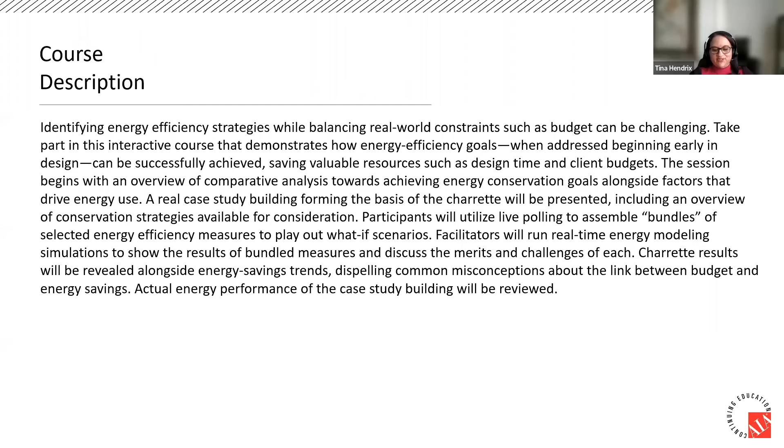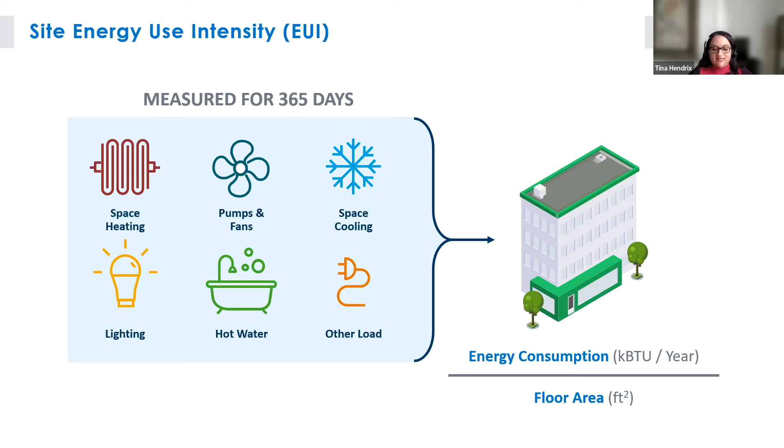You might be familiar with the difference between site EUI, which looks specifically at on-site energy consumption, and source EUI, which also takes into account inefficiencies in generation and transmission. But for today, we're keeping it simple and we're just looking at on-site EUI.

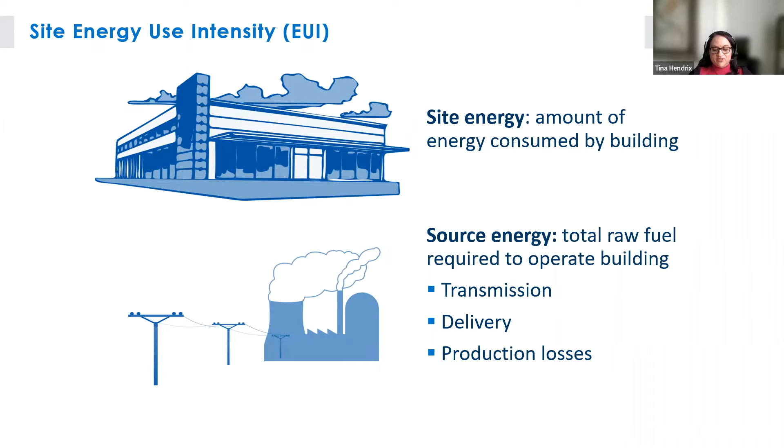So where do we start? Okay, I'm going to hand it over to Tan. So he's going to walk us through even further and define other parameters for us. So Tan, where do we start?

So far we kind of talked about the big picture of energy efficiency, basically the impact on the grid, and more importantly on the site. So right now we're going to dive in a little bit further on the energy efficiency of the building itself.

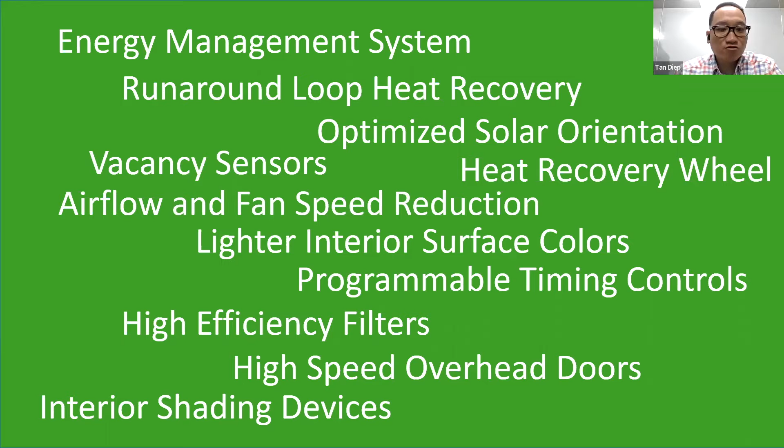So here we have an example of some efficiency strategies that you might want to consider. We have some additional and some more. And next thing you know, you become overwhelmed and you're unsure of where to start. So how do we cut through all this and make sense of what's going to be best for the project itself?

So let's clear the slate and let's start with knowing what the goals should be, or what would normally be, for most owners, their goals. Obviously, each one of these goals is a little bit different and they will lead you down a different path within your design. So it's important to understand which one of those goals it's going to be. Obviously, if you look at EUI, you might have a different path to go compared to what the payback would be. So understanding those goals is always the first step in deciding where to begin.

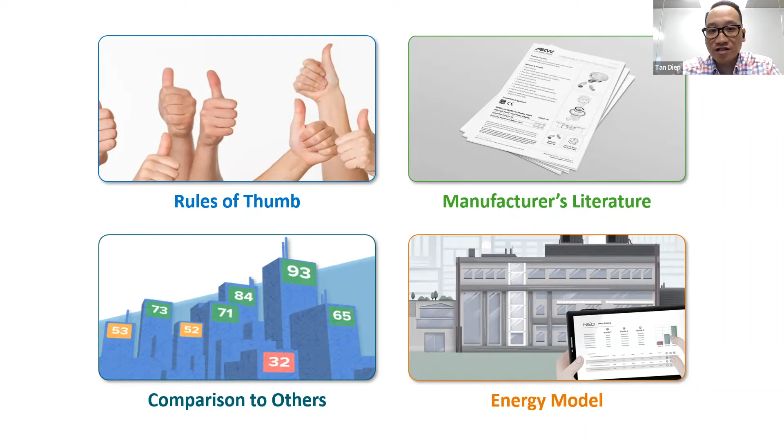Once you have your goals, it's a good time now to strategize. Well, what strategies do you usually use? Rules of thumb, maybe looking at manufacturer's literature and deciding upon particular equipment that way, or maybe looking at EUIs, comparing one building to another as a result, but also, more importantly, looking at energy models and comparing what those efficiencies would be in the building strategies that you would normally choose.

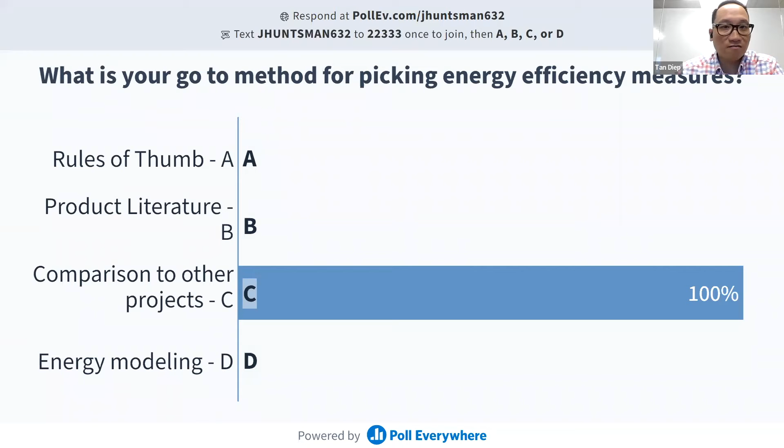So here's a quick poll. What's your current method that you would go with? A, rules of thumb. B, product literature. C, comparison of one project to another. Or D, energy modeling. So it looks like comparison of other previous projects is probably the common one that most folks on this presentation would normally do.

Now, what's important is also when we're comparing things, we're comparing two identical things together. You know, it's the old adage, are you comparing apples to apples, right? So when we're comparing buildings, take for example, we can easily take an example of a retail building in the same location, so identical climates, same function types, same square footage, window to wall ratio, and hours of operations are identical. But let's say we reorient one of the buildings by 45 degrees. You'll be surprised that the energy efficiency or usage is going to be slightly different compared to the two, even though everything else, all the variables, are almost identical.

But because we reoriented the building by 45 degrees, the sun may be impacting the building a little bit differently. So that would essentially affect what maybe your cooling loads would be. Maybe your lighting loads would be a little bit different as well. So those are going to be key factors in deciding and comparing everything.

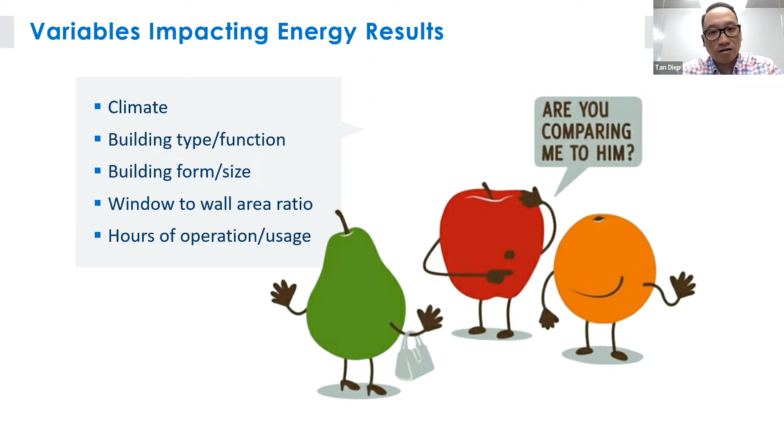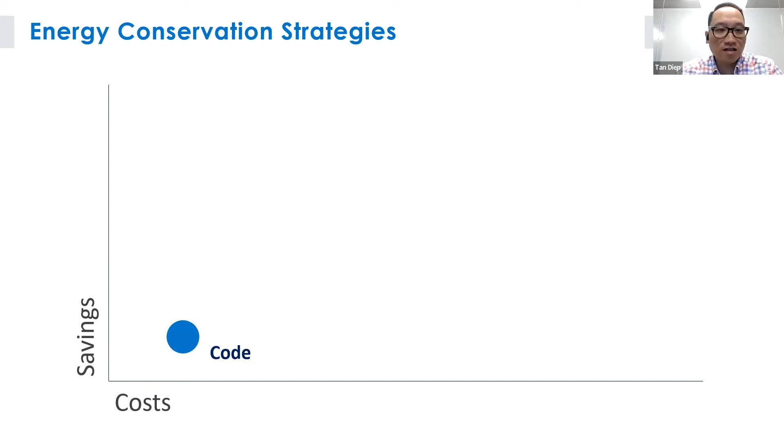When we look at these energy conservation strategies, we want to look at three scenarios: good, better, and best. Good typically being your current design, where it currently sits. Better is improved strategies above what the baseline threshold would normally be. And best, if cost wasn't a factor and everything was available, what would be the best solutions for you. But obviously we're trying to have that good balance between initial costs and energy savings of the building itself.

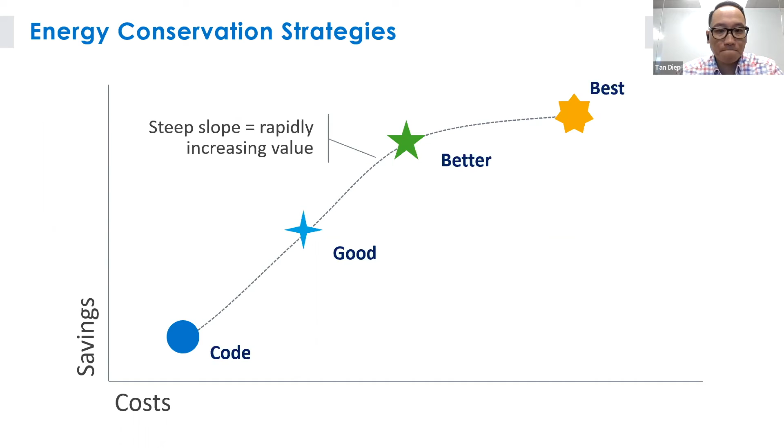The best time to start energy savings is as early as possible. Usually if you're in schematics or design development, it's a good time to start considering an energy model for this, because the earlier you have it, the better impact you can have within the design scope with minimal impact to what cost would be associated.

More importantly, you always want to prioritize minimizing the load first prior to implementing any cost-effective energy efficiency measures. Then you can look at renewables or alternate energy sources, and then consider operations and building usage as well. But usually it's best to reduce your load first.

We talk about reducing load first mainly because of the duck curve, which happens in California but also nationwide. There's been a huge ramp up in installing photovoltaics and renewable energy, but the problem is it's generating usage at the wrong time. There's a ramp up when the sun starts to go down to when we need that energy to go up, and that usage starts to increase now that photovoltaics aren't generating energy when we need it. That's what causes the duck curve.

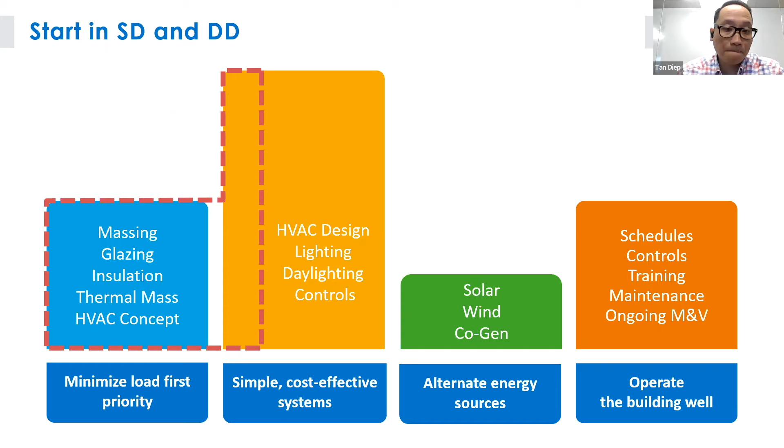Moving along here, when we're doing a comparative analysis, we always take into account what the building geometry would be, hours of operations, along with the weather, and we're looking at the minimum requirements. When we're talking about minimum requirements, we're talking about the type of equipment, like your HVAC, your service water heaters, the plug loads, or any type of heavy equipment that may draw higher loads within the building.

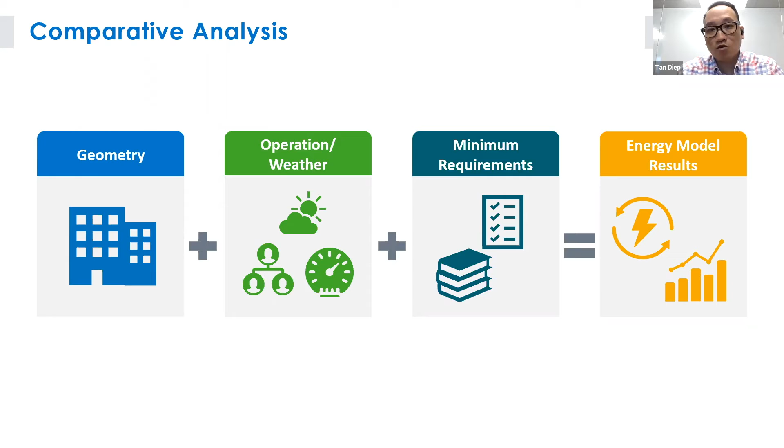When you're doing a comparative analysis of these model results, essentially what you're doing is keeping your geometry and operations exactly the same, then swapping out some of the equipment, like your HVACs or additional loads and efficiencies, to see what that comparative analysis or those results would be from each other. Because at the end of the day, when you look at these efficiency measures, it's not a straight addition of what those energy savings would be.

So that's why we have this math problem of 2 + 2 does not always equal 4. It's 3.25. A great example of this is maybe LED lighting.

LED lighting is a fairly easy, achievable item for a lot of people to do. But the problem is, with most LED lighting, it helps reduce the energy load, which in return helps with cooling loads during the summer. But it doesn't help with heating loads in the winter, because if you had a different type of lighting compared to LEDs, those lighting systems will emit some heat, which adds to the heat that would be passively generated within the building itself. So you may not necessarily need to heat up the building as much during the winter. It's kind of a give and take, and you're trying to find that balance.

As we said before, it's not a straight addition of energy savings. It's how everything interacts with each other at the end of the day.

Going back to that long list of energy efficiency measures, let's wipe the slate clean here and just focus in on these six measures instead, or categories. We'll concentrate on building massing, the envelope, lighting controls, HVAC, demand control, along with energy recovery.

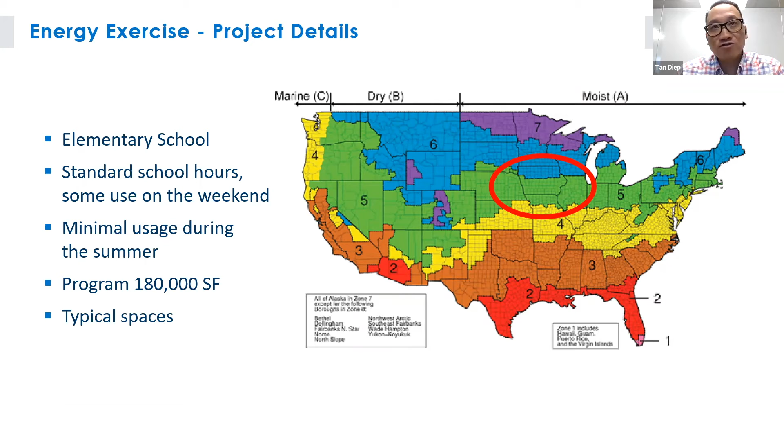For this live exercise, we're going to use a school project as an example. This project is going to be in the Midwest, in a different climate zone than what we're used to here. For us, in our climate zone, we're more in climate zone 3, under what IECC would refer to. But in this particular case, this project is in climate zone 5. So I'll point out the different strategies that we might consider for California instead. But for this exercise, we're going to have a project based in the Midwest here.

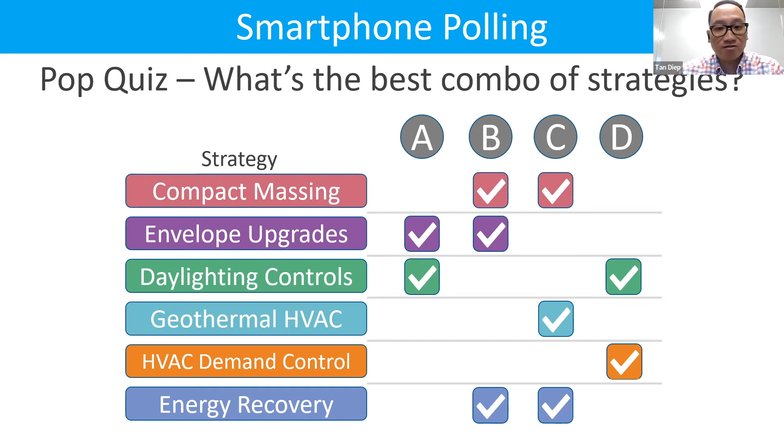Quick pop quiz. These are going to be 4 different combos of strategies here. I'm not providing a lot of information, so this is going to be your best guess, or first blush, of what would be the best combination of strategies that would provide the most impact to energy efficiency. Option A would be upgrading the envelope, with higher R values for the exterior walls and roofs, combined with daylighting controls. Option B, combinations of compact massing along with the improved envelope and energy recovery. Option C, compact massing and a geothermal HVAC system with an energy recovery system. Or D, daylighting controls and HVAC demand controls. So with that, which combination?

We have a question in the chat asking if it's an existing school upgrade or a new ground-up construction. It is a new ground-up construction. Thank you.

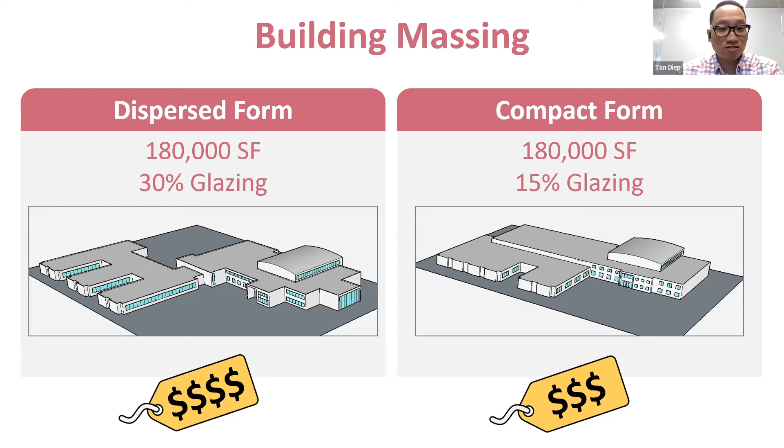Let's start with building massing. Here on the left, we have a dispersed form. The square footage is exactly the same for both. You can see the dispersed form has higher glazing, about double the window wall ratio compared to the compact form, but the cost for the dispersed form is also a little higher. There are trade-offs: with the dispersed form and higher glazing percentage, you get more daylighting coming into the school project, which could reduce lighting power density. The opposite occurs with the compact form, where you might need to increase lighting density because you don't have as much natural daylight coming into the building. So these energy saving strategies are not a straight addition; these factors play into each other, and energy modeling helps understand how these strategies interact.

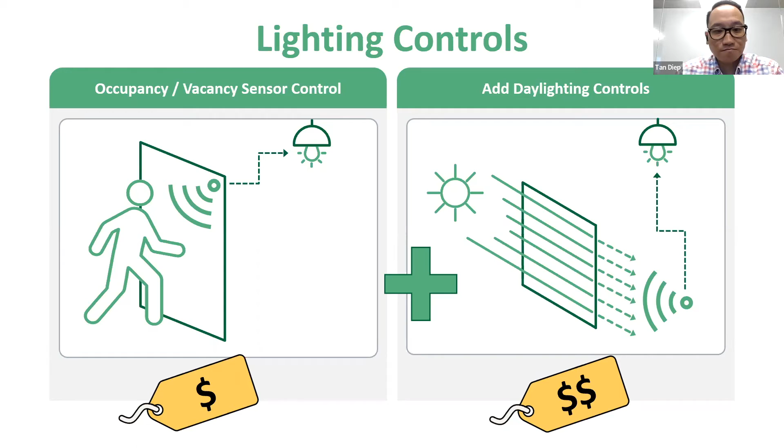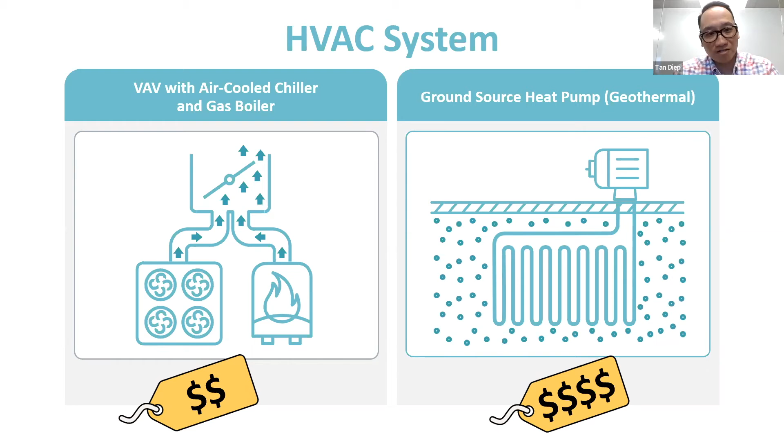Tan, one more question. Excuse me, on the dollar comparison, is it only the initial cost and not factoring in life cycle cost over a number of years? Correct, we are looking at the initial cost more than anything else. So when we're looking at the initial cost, that's going to be the incremental cost more than anything else, what that initial impact is. We're not factoring the life cycle cost. Obviously, if we were, you would have to start factoring what the annual energy savings would be, what that initial upfront cost would be, and then you can figure out what that cumulative energy savings would be and how quickly that payback would be.

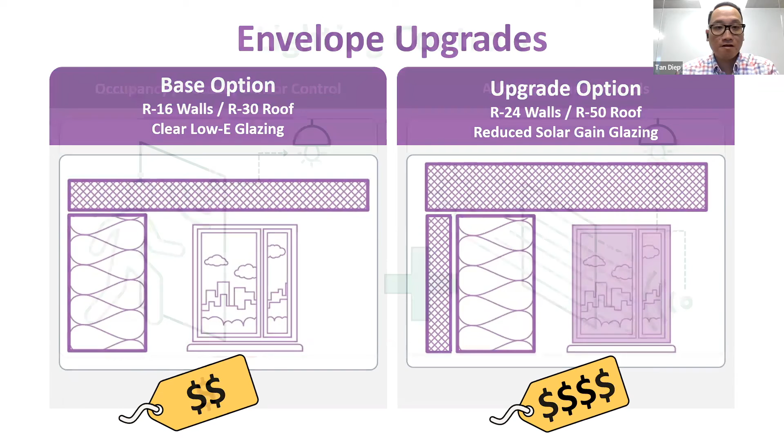But it's on an individual basis for most components that a lot of folks end up looking at. When you do an energy model, it's good to look at that cumulative for the whole building. Because usually if you just look at the individual cost payback for a lot of these items - and I'll go back here - the long paybacks are going to be in your envelope upgrades. A lot of times if you just look at the individual aspects, your envelopes are going to have like 60, 100-year payback periods, which is not ideal. So when you look at an individual aspect, it doesn't make sense. If you look at it as a building as a whole, with the combinations you have, you might see a different outcome or perspective. And that's what this is really driving towards more than anything else.

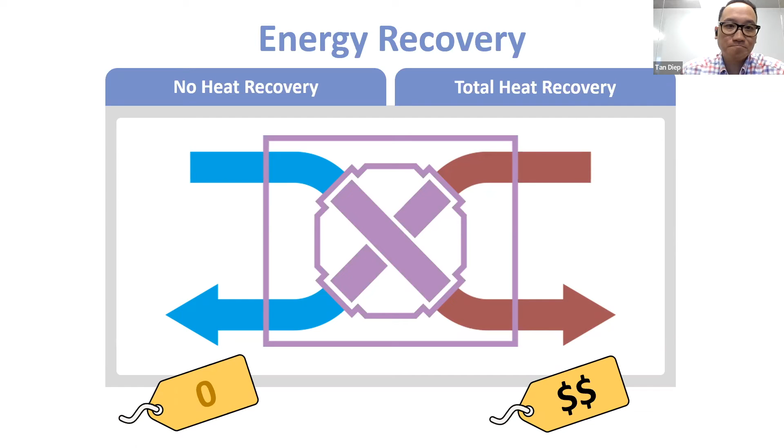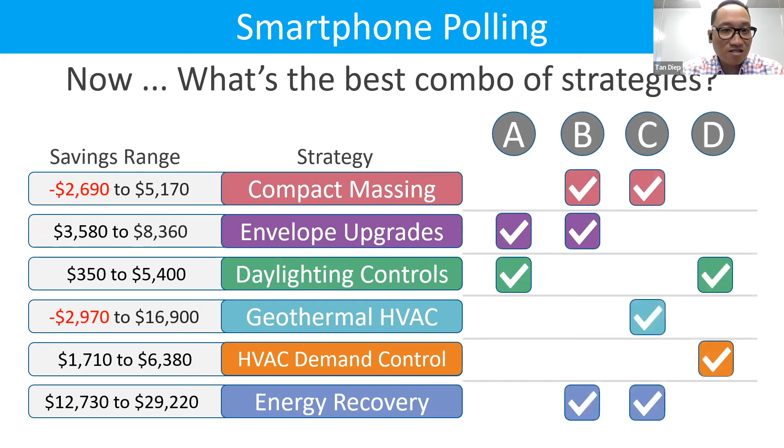Okay, so now that we've gone through the difference of strategies, let's see if your mind has changed. We're giving you a little bit more information here. We added energy savings range. You can see some of these additional items are giving you negative costs, depending upon the combinations. So the strategies or combos of strategies are still identical. The previous selection everyone chose was D, daylighting controls and HVAC demand controls. Let's see if, given the information we provided, that has changed.

So given the information we talked about, has your decision changed? Okay, so it looks like the group is seeing maybe envelope and daylighting controls as a much more efficient strategy instead of compact strategies.

Okay, let's go through the results of what the group has selected. Everyone kind of selected A. Tina, what was the combination for A? It was the envelope upgrade and the daylighting controls. Okay, so that would be the dispersed massing, envelope upgrade, daylighting controls. HVAC was the base, no demand controls for the HVAC, and no heat recovery. Okay, let's see where we are with this here.

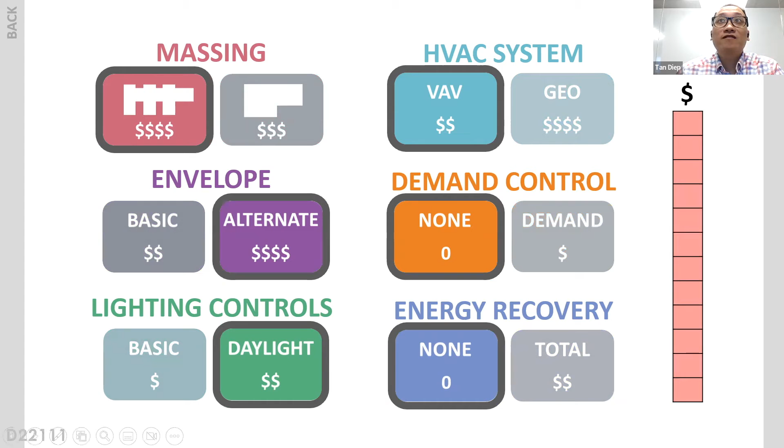Okay, so here are the results of what the group today selected. Here we have, you can see here, we're going to have an annual energy savings of $35,000 a year with an EUI of 60. Not bad.

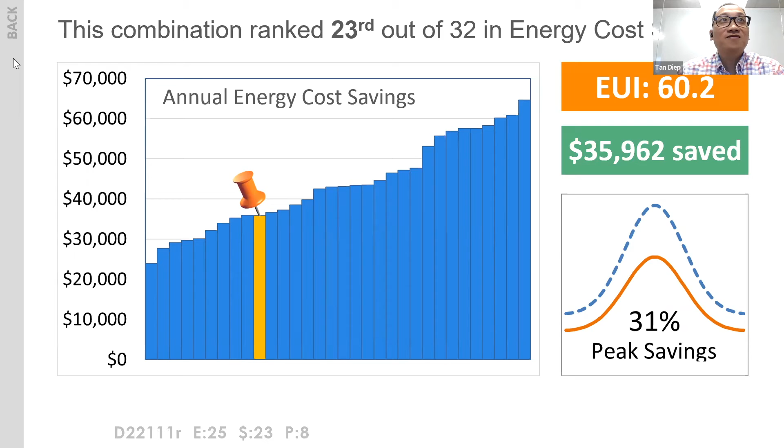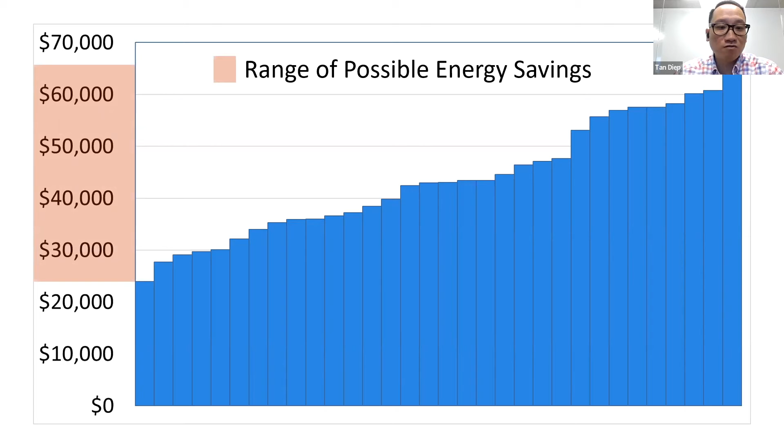Okay, so let's go further with this energy analysis trends and look at the overall results. I didn't explain the chart in the beginning, but basically with the combinations of strategies we have, there are 32 essentially combinations available with the 6 strategies we have. We rank them by annual energy savings and percentages. Right now, that means we could have as high as a 40% reduction off of the base compared to the energy bills, and we can have as much as 65,000 in annual energy savings. That's not bad. So in the range of possibility, there are 32 combinations available, and we'll go through some of these and where they lie.

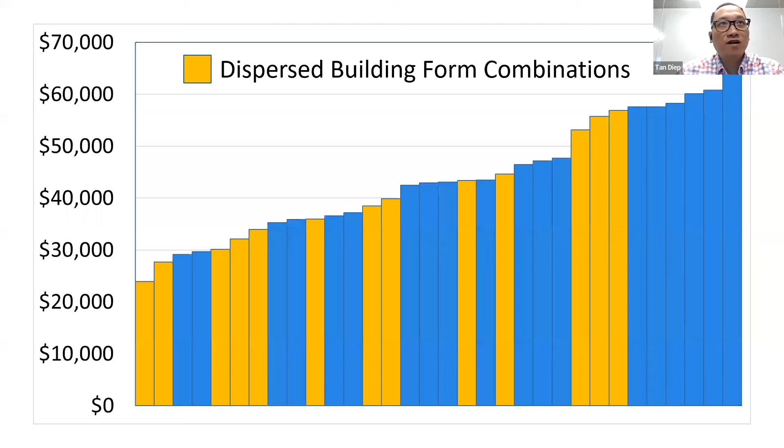The ground source HVAC combination is somewhere in the middle, and you would think, because this would be the best system for this particular climate type, that you would have higher savings. That outlier right here is probably in combination with that energy recovery system. So it's kind of dependent upon the combination you're using, whether or not you're using it with the ERV and the additional controls.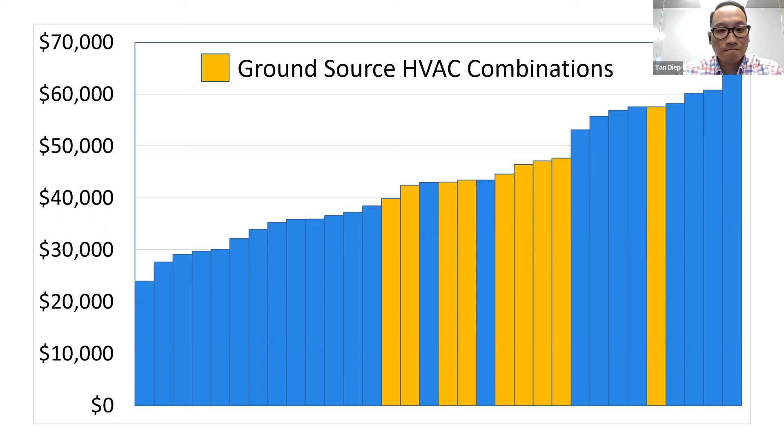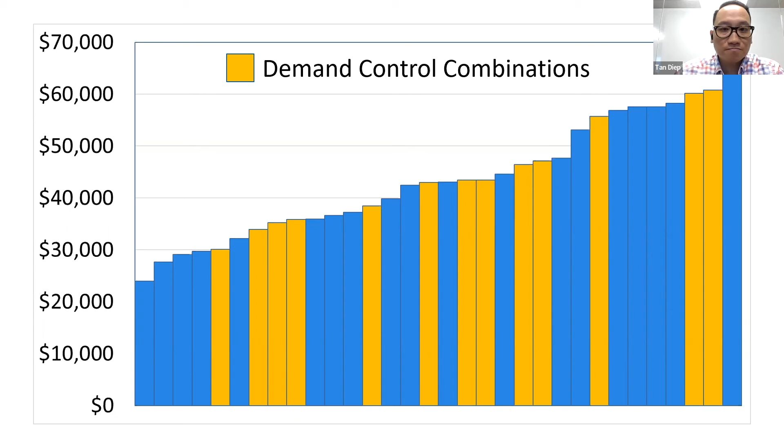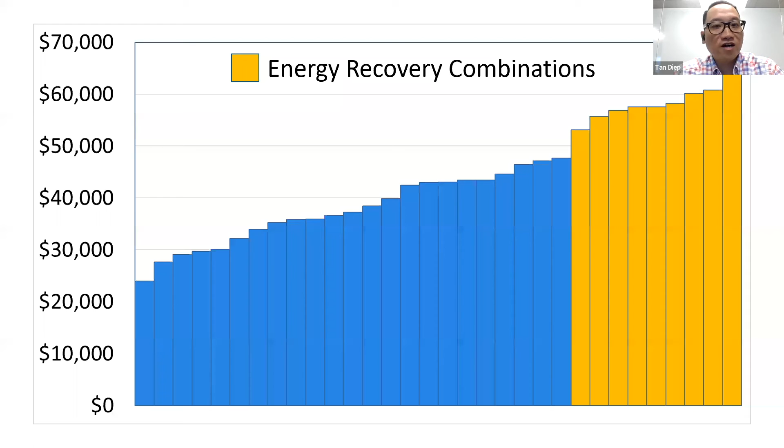And then when we look at the energy recovery combinations, it is in the top 9 of the board in rankings of energy savings. So just adding in energy cost savings with the incremental cost of it can really help drive some of the additional annual energy savings costs that you'll normally see in a building.

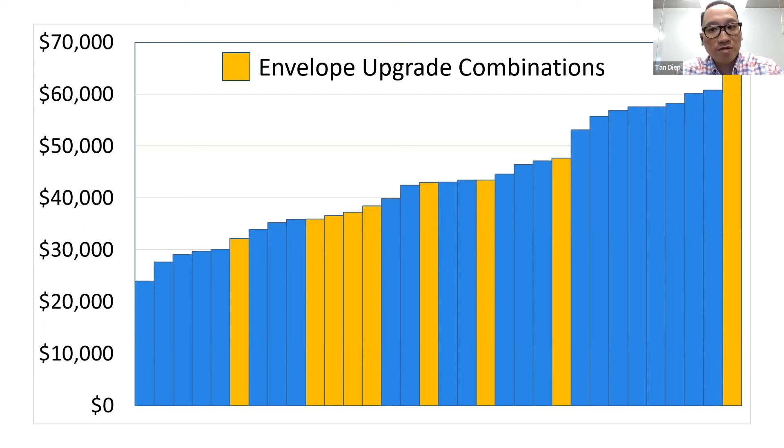And then the envelope upgrade combinations, you can see it's a little bit more expensive, but it's also dependent upon the combinations of the mechanical equipment and whether or not you're using it with an energy recovery system, and how much that would drive energy savings.

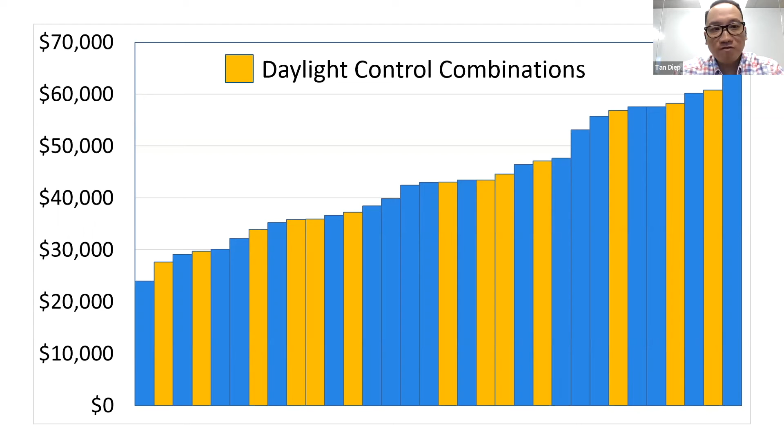And then your daylighting control, once again, not a huge driver compared to some of the other combinations you'll see here. So it's easy to fit anywhere within those combinations of designs you're going to do. We usually call these the low-hanging fruits at the end of the day. Look for your big drivers first, and then pick your low-hanging fruits where you can, because the costs for some of these are fairly inexpensive.

And more importantly, I think this is where the modeling exercises really play a big part, is understanding that here we have all the low cost combinations. You can actually get some highly efficient energy savings without breaking the bank. Even with the ERV, the energy recovery system, depending upon the combinations you use, you can actually get some fairly high energy cost savings, close to 58,000 a year.

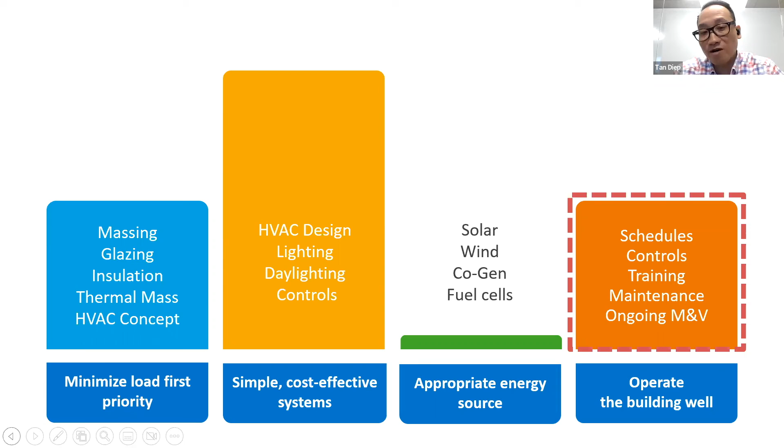Moving along then. As we mentioned, the optimal time to try to do energy modeling is always at schematics or early design development, to help determine what the simple and cost-effective systems would normally be. You're trying to predict how the building is going to use energy, and it's always important to measure and verify how it's actually being used. We use the example of EUI a lot, like miles per gallon—much like miles per gallon, it's just dependent upon how a person drives or uses the building.

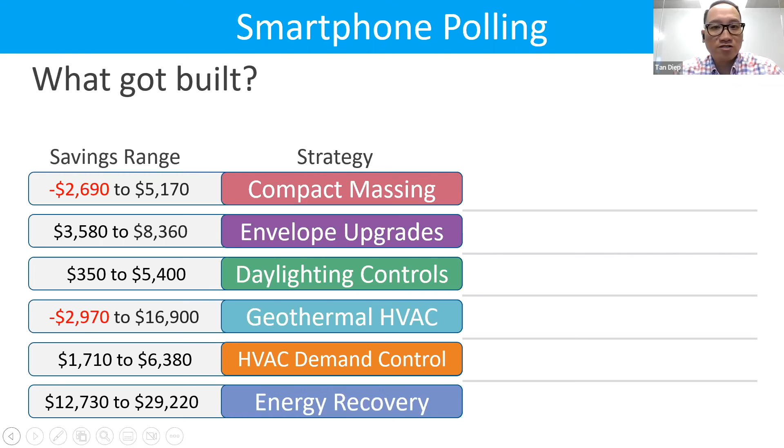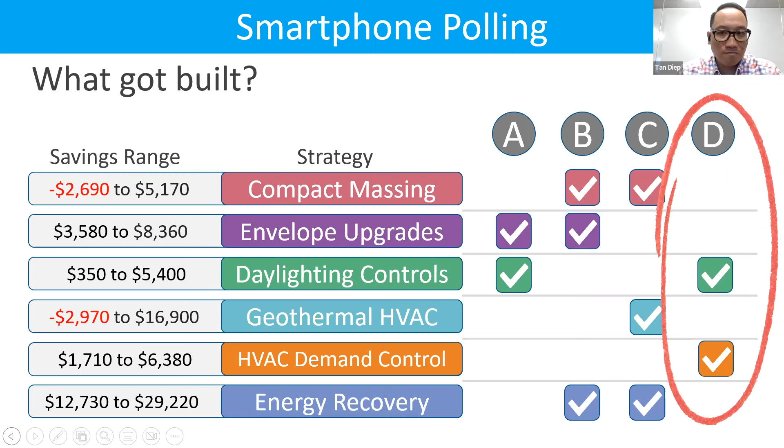Thank you. So, what ended up getting built? Out of all the combinations, the funny thing is the first decision the group decided upon was actually what the design team ended up going with. They went with the two most low-hanging fruits. A lot of factors played into this, but that's what they decided to go with instead. The reason they probably didn't go with energy recovery was because of maintenance—the school district wasn't too familiar with the system, so they didn't want to include it, and weren't sure if it would be worth their while or how they would maintain it.

They still went with the dispersed form. They wanted natural daylighting as much as possible, because schools always like a lot of natural daylight—it helps with learning. So we understand where that aspect came from.

If we were to go off strictly of numbers—values from modeling exercises—we would always end up with a building design looking a lot like, I like to use the example, a Yeti cooler with a couple punch openings. That's exactly what you'd get if we went strictly by the performance of an energy model. We know these decisions—we want to have that balance between the art of the building and the science of the building. We want to marry that up, and energy modeling kind of helps marry that up for you, so you land somewhere in between.

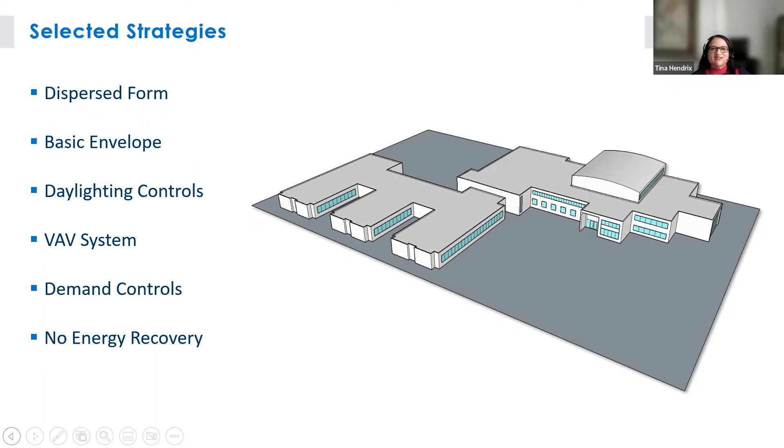In the chat, there's a question about whether they decided this due to code requirements—the energy recovery, or what code requirements?

I'm assuming it's the energy recovery. Let me see if Jason will clarify—the project was based in Iowa, and Iowa does not have an energy recovery requirement. Iowa is based off of ASHRAE 90.1 2010. So yeah, there's no requirement there; this is actually base building code requirements, and base code didn't have an energy recovery requirement. So most of these strategies were really off of base code, and the only thing they went above and beyond base code on was essentially the demand controls and the daylight controls.

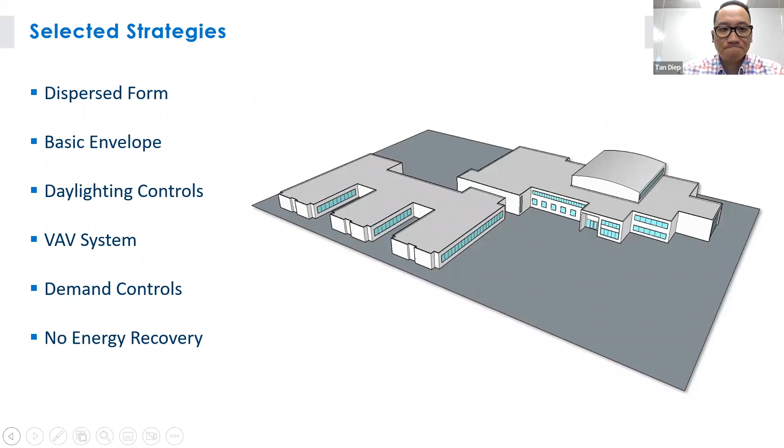Great, thank you. So with the selection that the school district actually selected, you can see here they had an EUI of 61.4, and they would have an energy savings of $33,000 a year.

What is also interesting is that as they were going through the project, midway through they decided against the VAV system and decided to install geothermal instead. It took a little bit of timing, but they managed to find additional spending. It did exceed their budget a little bit, but they were okay with it mainly because they saw the value in the energy savings—it moved them from $33,000 a year up by another 10,000, so they were about $43,000 a year.

Then in discussions, or the group asking about the cost payback, or basically annual operational costs, they saw that with the additional $10,000 a year, their payback period for the additional cost of the ground source heat pump would be paid back a little bit faster than they anticipated. So that kind of helped them out in factoring in those decisions.

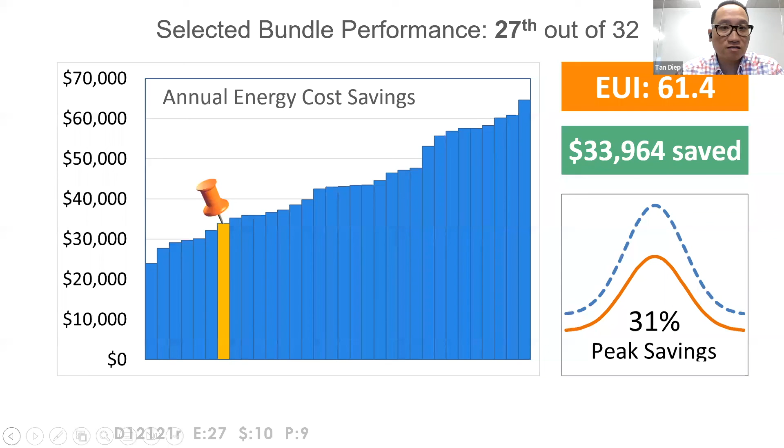The additional item that caused a bit of that discrepancy is that a school teacher complained about one of the daylight controls in their room. And instead of trying to fix the problem, they just essentially turned off the daylighting controls, so essentially any energy savings was null and void as a result.